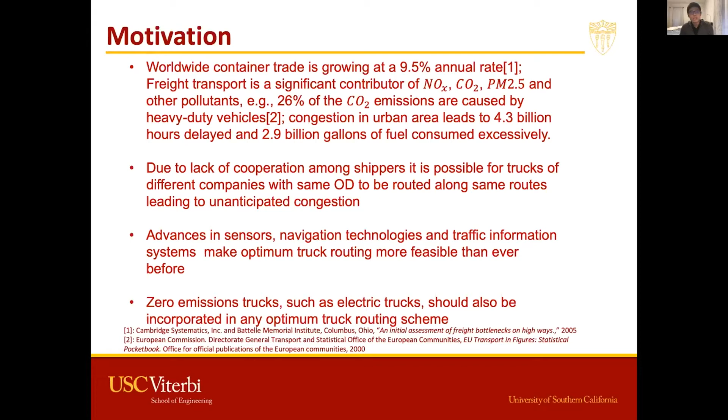So the objectives of our project are, first, we'll develop a traffic flow simulation model with the ability to reconfigure itself in real time and account for the dynamics of different classes of vehicles to predict travel times and flows. Second, we integrate the real-time traffic simulator with vehicle routing optimizations and evaluate the feasibility of the schemes for fast real-time routing decisions.

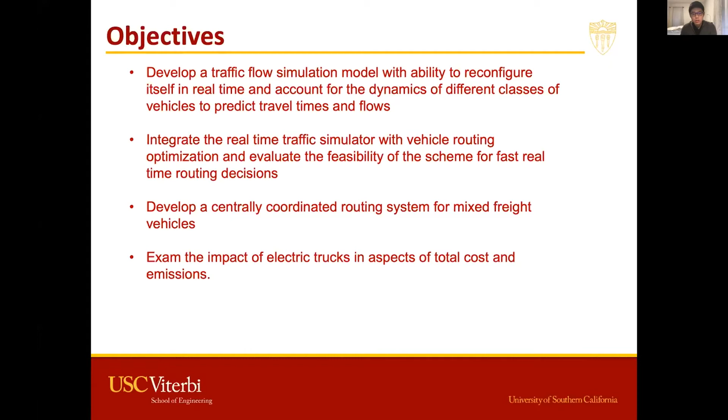And third, with the simulator and the optimizer, we develop a centrally coordinated routing system with mixed freight vehicles. And at the end, we examine the impact of electric trucks in aspects of total cost and emissions. So here I show the general form of the optimization model.

And with the formulation constructed, let us move to the methodology we propose. We first input the information of origin-destination demands, mixed freight distribution, road networks, etc., into the optimal load balancing sector. In this sector, we build a service network that is in charge of optimization, which includes minimum cost route searching, updating, and load balancing.

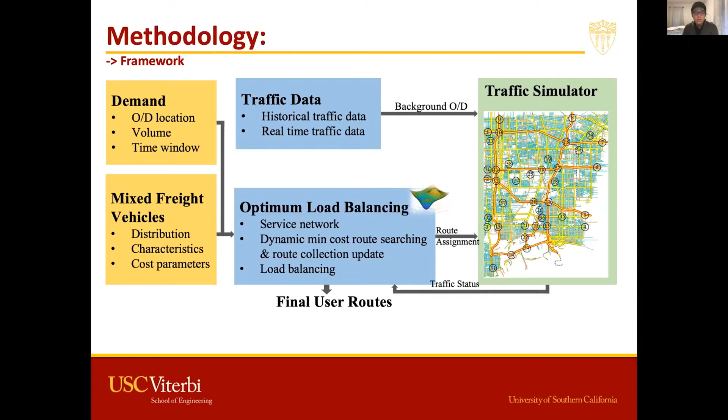So since the model needs the characteristics of different types of freight under realistic working status, we started to gather some survey projects using diesel and electric trucks. And the projects include the Port of Los Angeles electric drayage, Foothill bus, Frito-Lay delivery truck, Smith Newton truck study, Navistar eStar truck study, and studies from the California Air Resources Board.

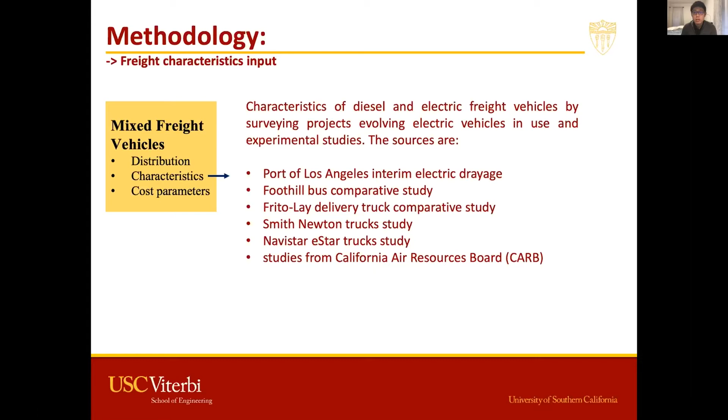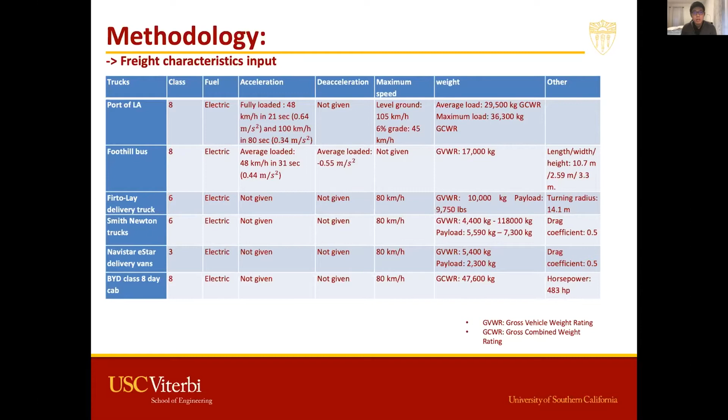And here's a table that summarizes the characteristics in these projects. For example, the Class 8 electric trucks in the Port of LA have a maximum speed of 65 miles per hour on level ground, and reach 30 miles per hour in 21 seconds. And here are some dynamic characteristics of the top popular diesel freight vehicles we gathered.

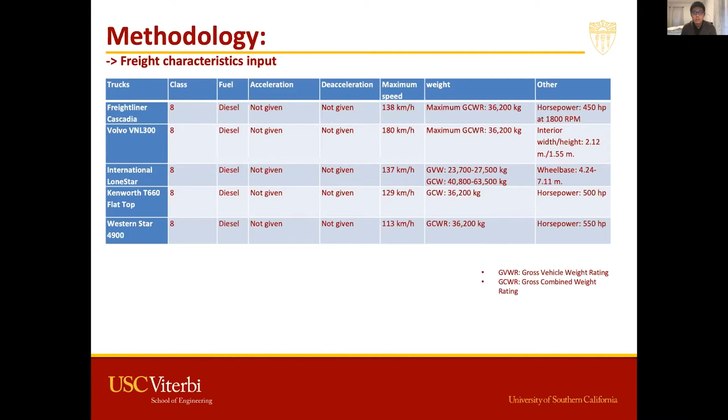And here we also gather the fuel economy of freight vehicles used in these references. For instance, Class 8 electric trucks used in the Port of LA cover 10.8 miles with 1 diesel gallon equivalent of energy.

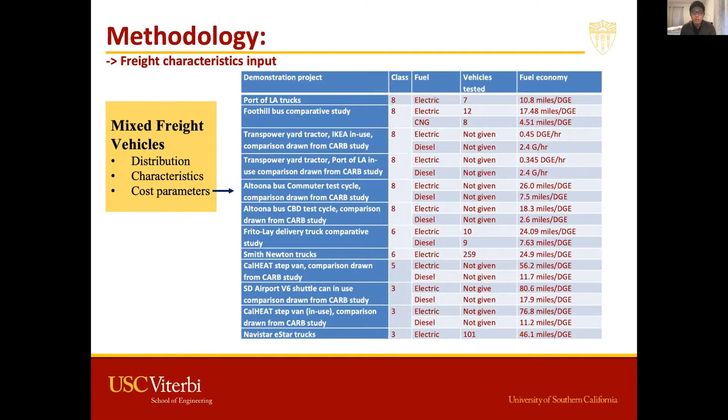However, the aforementioned literatures consider the average fuel consumption, and average fuel consumption only reflects limited information, because working conditions of vehicles may change and the fuel economy will vary a lot.

Also, since we tend to implement a very detailed traffic simulator for this project, which will provide us with plenty of traffic network information, we then propose to use analytical energy consumption models of diesel and electric freight vehicles with the help of our simulator. The analytical energy model is then implemented and tested with 5 drive cycles suggested by National Renewable Energy Laboratory. The units we used is kilowatt-hour.

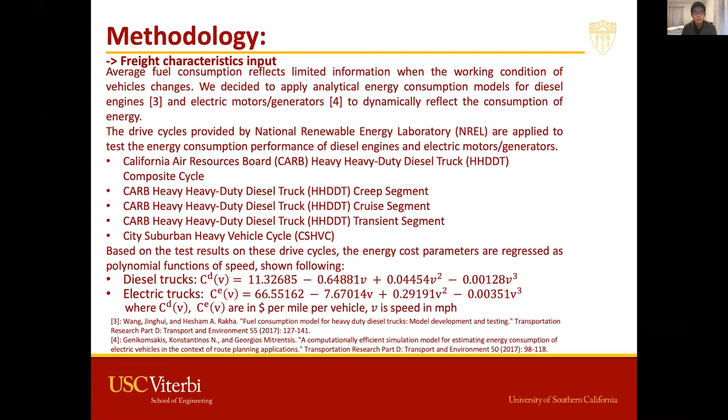Other than that, the dynamics of the traffic networks are complicated. So the way we choose is we introduce a higher level service network using traffic status aggregated from the traffic simulator for the optimization purpose, and use the traffic simulator to take care of the dynamics of the traffic network.

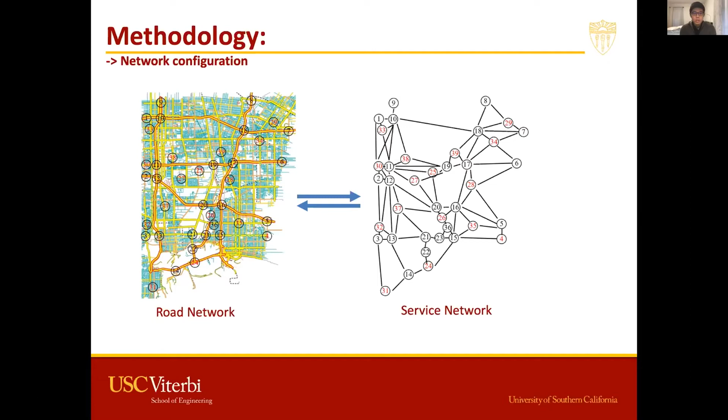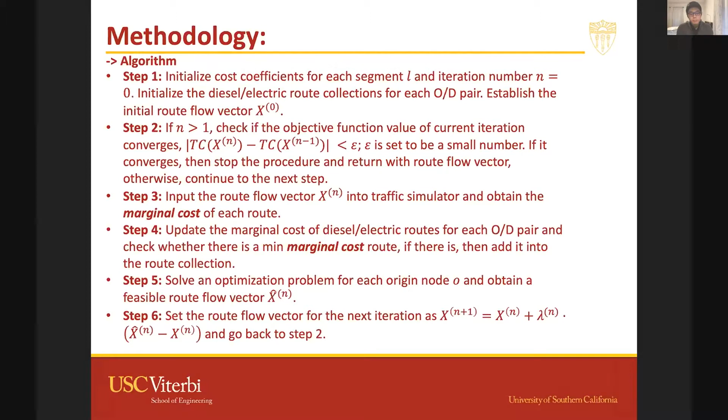And how can we use these marginal costs in the algorithm? We can use it to give us a descent direction. With the marginal cost updated for each link in the network, we can check if a new minimum cost path exists for each OD pair. By solving the following linear programming that takes care of the availability issue of trucks at each node, we can obtain an augmented route flow vector X hat, which can be used to generate a descent direction by minus the assignments from the previous iteration, which is capital X. Another use of the marginal cost is it can help us to choose the step size.

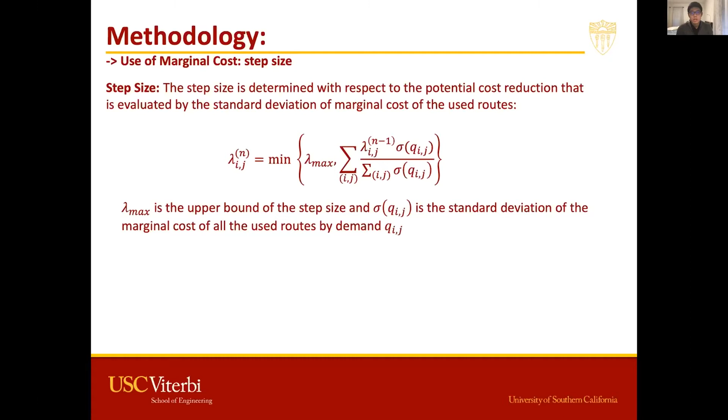So the idea is if the marginal costs of all the paths for a specific OD are close to each other and the volume on them is feasible, then the assignment for this OD pair is balanced. We use the standard deviation, and the standard deviation is regarded as a criterion of the balance, whether we are balanced or not.

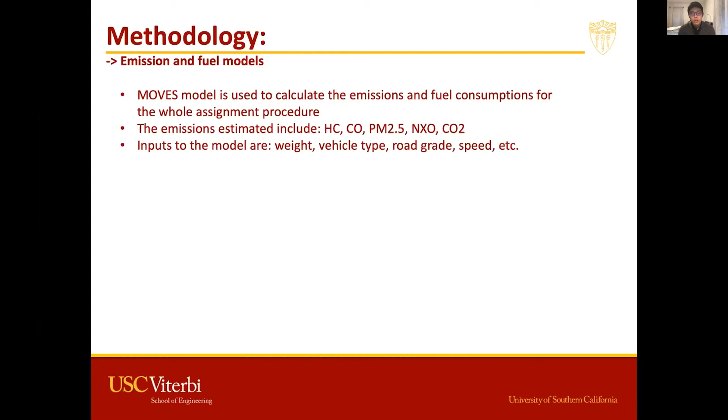We then evaluate the emissions and fuel consumption of the output assignment results with the MOVES model. The emissions estimated include hydrocarbons, CO, PM2.5, NOx, and CO2. And then we do some experiments for our proposed methodology.

The road network covers the Los Angeles Long Beach terminal port area from the south side to the I-105 freeway on the north side. The total number of demand is 1,715. And for the distribution of the mixed freight, we assume the total number of mixed freight at each origin node to be the same as the containers that need to be transported at that node.

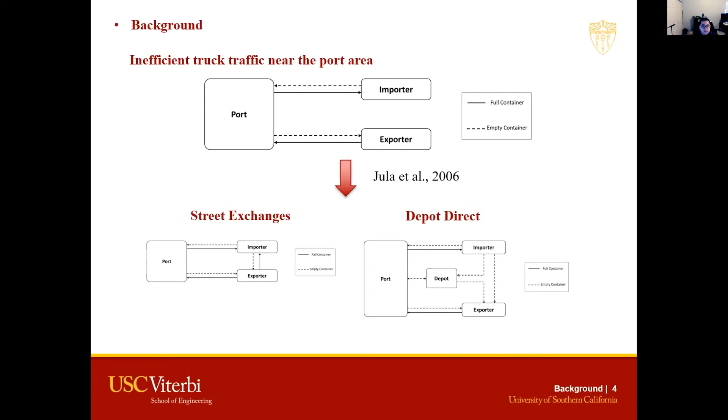Besides preceding research conducted by Professor Dessouky and Dr. Carvajal introduced the double container trucks into the empty container repositioning problem. The model is called Double Container Assignment Model, DCAM, which studied daily operations for moving containers. The model showed the benefits of using double container trucks.

First, it can reduce the total number of trips, and it can reduce the total number of trucks in the network. It can also increase the possible routes between all the locations. So from a managerial perspective, it can reduce the administrative cost as well, because you have less trucks to manage.

So a single container truck can only carry one loaded container or one empty container, but a double container truck can carry two empty containers or two loaded containers, or one loaded and one empty container. So in this case, the possible routes between all the locations increases.

However, the model has its limitation. The model assumes a truck must drop off both its containers before allowing for another pickup. So in my research, we have overcome this assumption. So I will introduce that later on.

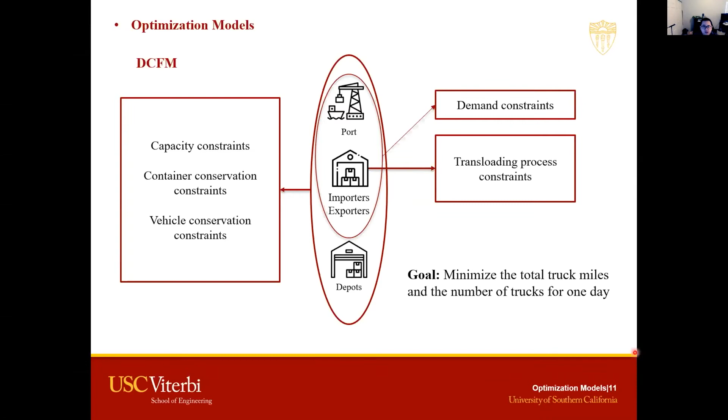Also, we are using double container trucks to carry these containers. So we have vehicle conservation constraints for each location. And importers, exporters, and the port all have their demand. Therefore, we have the demand constraints for these locations. And in the end, we have the transloading constraints for importers and exporters to describe the transloading process in these locations. And the objective function is to minimize the total truck miles and the number of trucks for one-day operation.

And after proposing the model, we feel like in practice, we cannot only focus on one specific day, because the problem is not meant to be solved in a vacuum. Therefore, we proposed a stochastic double container flexible pickup and drop-off model, which is called SDCFM. The S represents the stochasticity. So we introduced the future stochastic demand into the model.

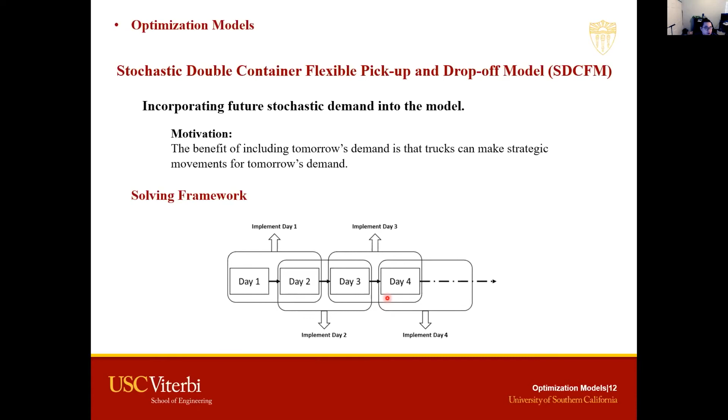And by considering the second day demand, trucks can make strategic movements for tomorrow's demand in the first day. And in this model, we developed a rolling horizon-based solving framework. Basically, we solve a 2-day problem iteratively and only implement the first-day solution. So this is our solving framework.

So we assume the first-day demand is deterministic, and second-day demand follows a Markov chain in which each state has some probability distributions. We assume the transitional probability and probability density function of demands can be obtained from the historical data, and we also assume the port has S different scenarios, each with probability delta S of occurring.

Also, since we are looking at a 2-day problem, we have to consider the connection between the container allocation at the end of the first day and the container allocation at the beginning of the second day. So we assume that import containers that stay at an importer will be unloaded to empty containers overnight. And similarly, the empty containers that stay at the exporter will be loaded to export containers.

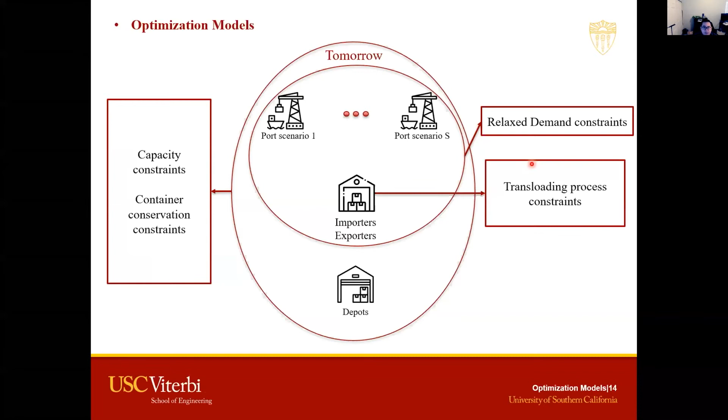So unlike the first day demand, which has to be strictly satisfied, we allow second day demand to remain unmet, but with a penalty cost. So the second day constraints are very similar to the previous constraints. We still have the capacity constraint, the container conservation constraint, and the transloading process constraints. But for the second day demand constraints, we relax the constraints by applying some penalty on the unmet demand.

So after that, we have to build a bridge between 2 days, and the connection is the second day initial state constraints. In SDCFM, our objective function is to minimize the total truck miles for 2 days and minimize the total number of trucks we used for the first day, because we only implement the first day solution.

And here is a brief summary of all the models. So the DCAM model is the published model, which shows the benefits of employing double container trucks in the empty container repositioning problem. But it has a pickup and drop-off requirement. And the DCFM model is the new model which relaxed the pickup and drop-off requirements. But both of these two models only focus on a 1-day problem.

So on top of that, we introduce SDCFM, incorporate the future demand into the DCFM model, and solve the problem by the rolling horizon-based approach. So let's talk about the experimental analysis. So we ran experiments on the San Pedro Bay Area, and the daily horizon is 12 hours, with time discretized into 1 hour length. And the capacity for all the transloading locations is 20 units of containers.

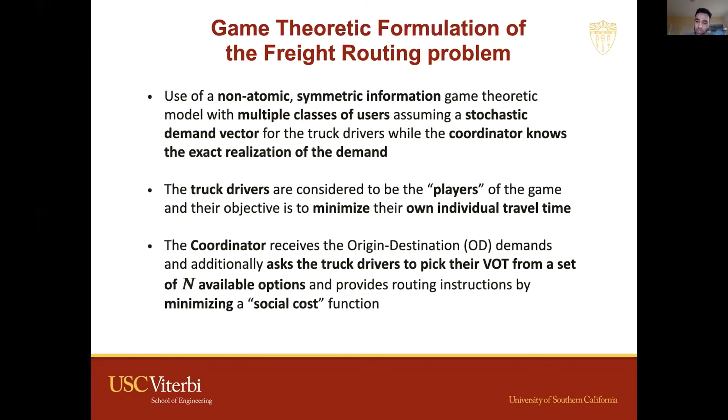So as I said before, we are trying to design pricing and routing schemes that are going to be applied to the truck drivers. So we have an overall coordinator in the network who is going to ask the truck drivers to declare their desired origin-destination pair, from which origin to which destination they would like to travel, and additionally pick their value of time from a set of n available options. His or her objective will be to minimize an overall social cost function. We will later define what the social cost function means.

So first I would like to talk about the user equilibrium problem. I'm not going to stick to the math that much. The user equilibrium problem is a mathematical model that describes the condition of the network when every user is trying to minimize his or her own individual travel cost, which in our case is travel time. So this is the mathematical formulation of the user equilibrium model. And as I said before, a user equilibrium model is user optimal, but it's not system optimal.

On the other hand, the system optimum model is trying to minimize the objective function that you see in this mathematical formulation: the expected total travel time of the trucks in the network, the expected total travel time of the passenger vehicles, and the expected total monetary cost of the truck drivers, which is a weighted combination of their travel time weighted by the value of time of the class they belong to.

So someone would say, okay, since user equilibrium implies user optimality, but user optimality does not imply system optimality, why don't we apply the system optimum problem in the network right away?

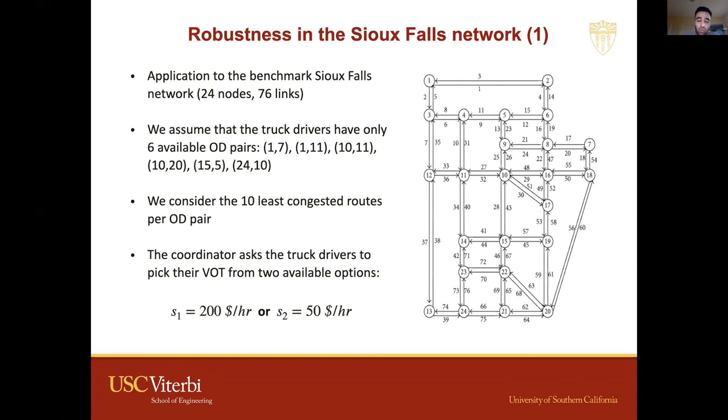And we also assume that we have two classes of value of time. The first one is $200 per hour. The second one is $50 per hour. And the truck drivers are asked to pick their value of time, to pick one of the two classes. Some additional details that I don't have to go through at this point.

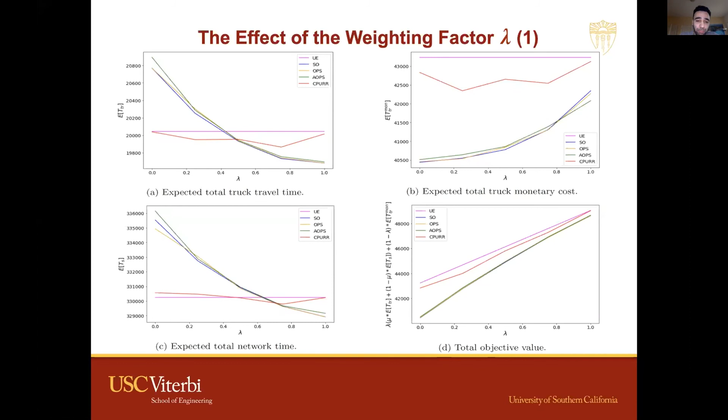When we are talking about the congestion pricing with uniform revenue refunding scheme, we see that when we reach 16 origin-destination pairs for the trucks, the problem becomes computationally intractable. On the other hand, for the optimum pricing scheme that I said might not scale that much in large transportation networks, it is shown here that when we reach 20 origin-destination pairs, again, it becomes computationally

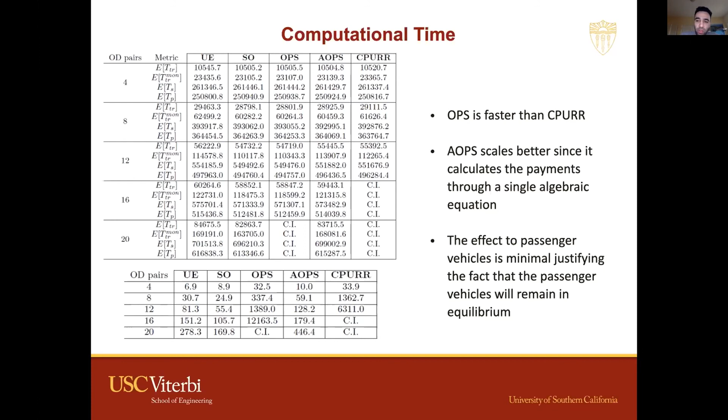intractable. However, if you take a look at Table 2 and the approximately optimum pricing scheme, we see that when the number of origin-destination pairs is 20, the approximately optimal pricing scheme can be solved in 446 seconds in our simulations, which is a pretty fast solution, given the fact that all of these algorithms that we are talking about are actually planning algorithms.

So to conclude, our main motivation was that the network usually follows a user equilibrium solution, which implies user optimality. However, user optimality does not imply system optimality. On the other hand, we cannot apply a system optimum solution in the network because some drivers may benefit while some others may be harmed compared to the user equilibrium. And that's why we wanted to design some pricing and routing schemes.

Compared to all the previous research efforts, which assumed that the value of time of the drivers is generally unobservable, or made assumptions about the distribution that the value of time of the drivers might follow, here we were able to come up with a design that allows us to ask the truck drivers to pick their value of time from a set of n available options and guarantee the truthfulness property. In other words, we provide incentives to the drivers to truthfully declare their value of time.

And we use this information to design value of time-based pricing schemes, which have been shown to be really beneficial in previous research efforts. So in future work, we would like to extend the current approach and apply it to passenger vehicles. We would also like to, instead of having a route-based pricing scheme, which means that we calculate a different payment for each route, design a different payment for each link, which would help us to scale our experiments further.